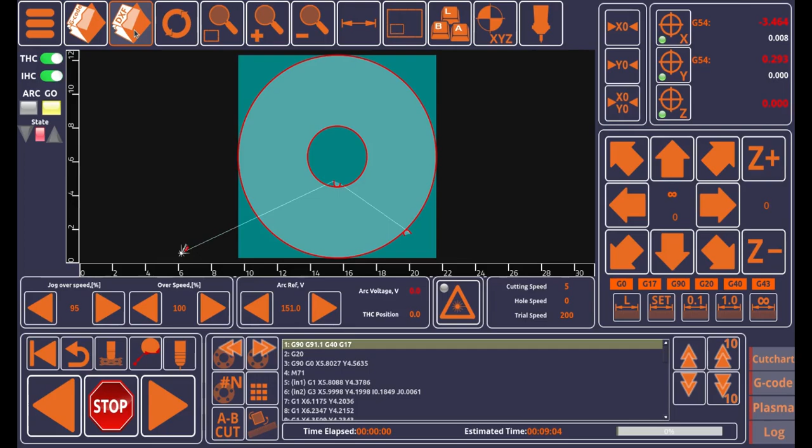So here I have a profile for MyCNC plasma cutting, and the DXF import button already has the command assigned to it, which is the DXF2-import command instead of the regular DXF-import. So DXF2-import is the new functionality. If we click on this button, we'll see the CAM window that we've already described in our previous video. However, here we're interested in the CAD functionality.

So here I have the CAD window in front of me, and it has a number of features that allow us to draw and design our own shapes, and then import them into the CAM window, and from there on import them into MyCNC. So let's quickly go over some examples to get a general feel of what we can do and design within the CAD window.

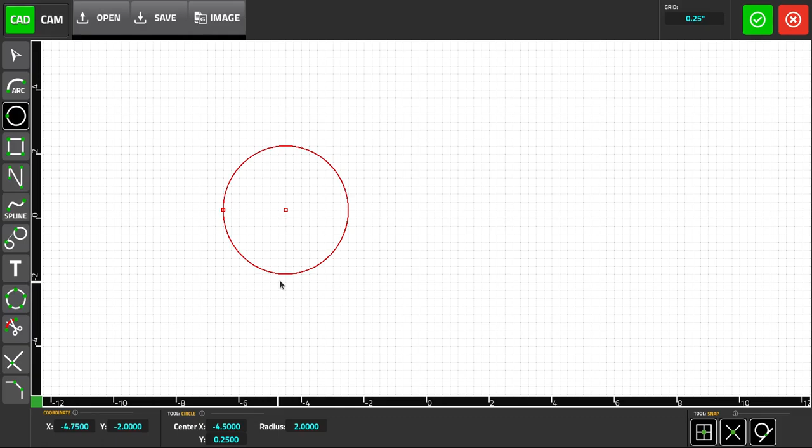First off, we can use the snap tool to snap the cursor to our grid, to our existing points, and to circles and tangent lines. We can set our grid, and then let's say we have this circle. It has a certain radius, maybe a radius of 2. It's positioned at a certain location. We can add more shapes. Let's say maybe we'll add some splines within this rectangle.

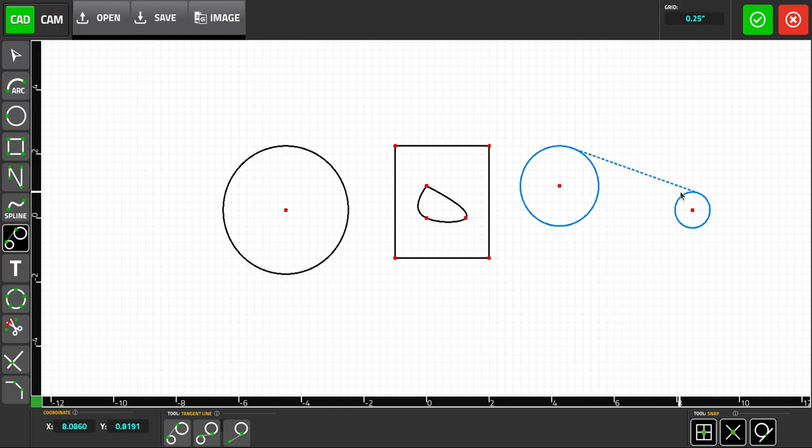We can create some circles that will be connected through tangent lines. And then we can also do things like remove certain lines. We can do things like subdivide circles into a set number of points. We can add things like text. And then we can also find intersections between points and do chamfers.

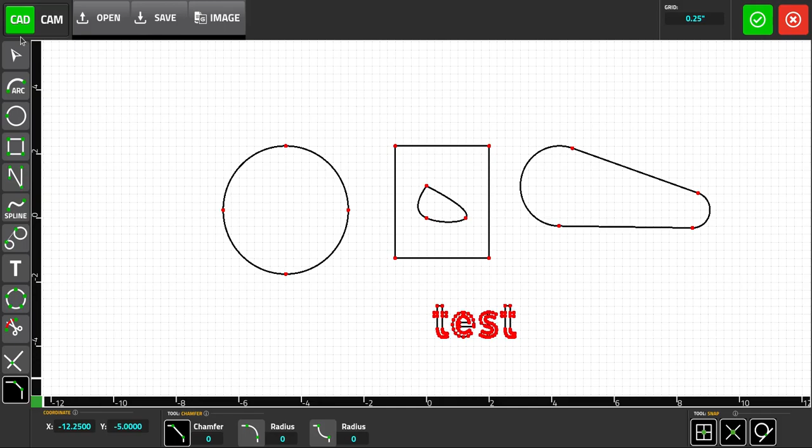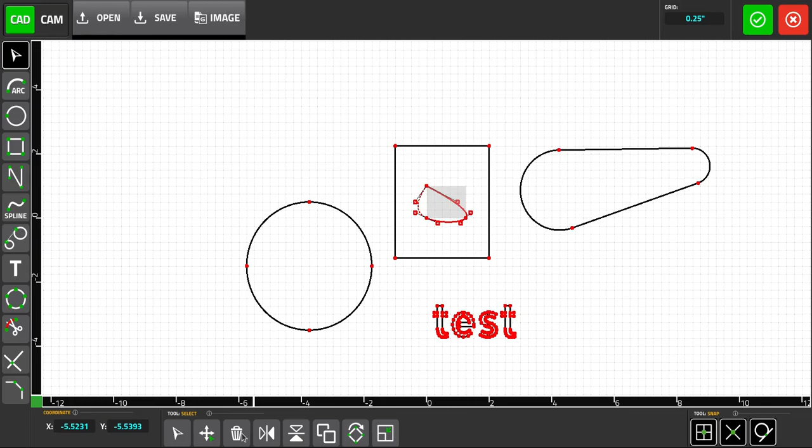So let's say we now want to manipulate this. We can select a certain shape and we can move it around, for instance. We can mirror a certain shape vertically or horizontally. We can delete a certain shape. Or we can also do things like copy, rotate, etc.

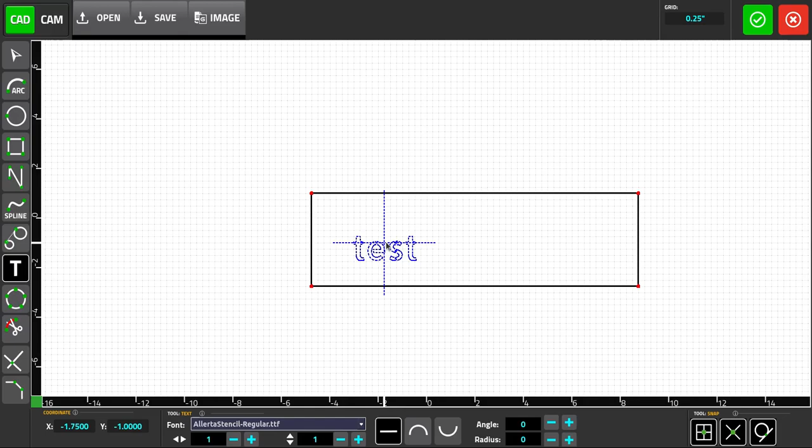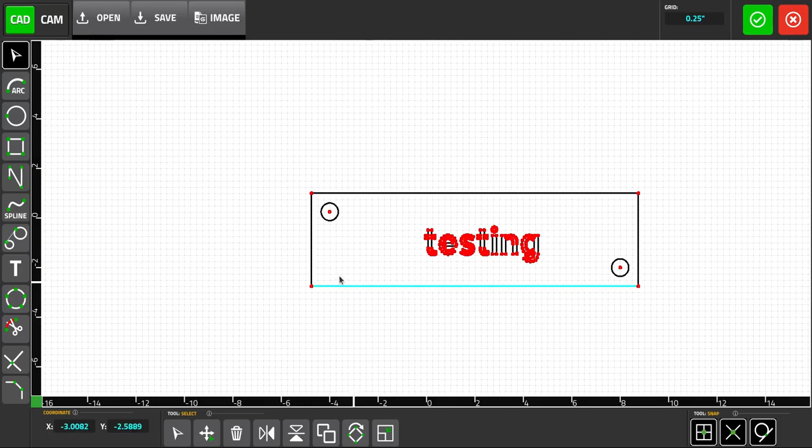So now that we have all of these things, let's say we just have a simple image here with a word testing and a couple of holes here that we're going to copy. Now that we have some kind of a file ready and we'd like to import it into MyCNC, we can click on the confirm button.

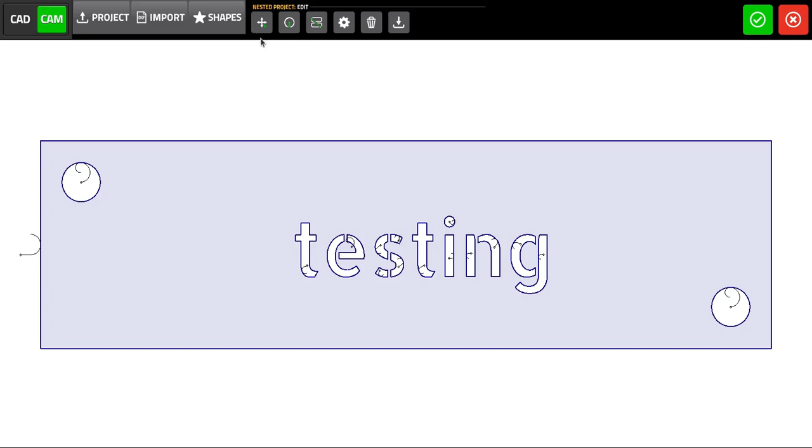So this imports it into our CAM window, and from here on we can edit it in the similar way that we've shown in the previous video. So do things like lead editing, we can scale this image, we can change things like our curve, etc. We can add more things like additional shapes next to it, etc.

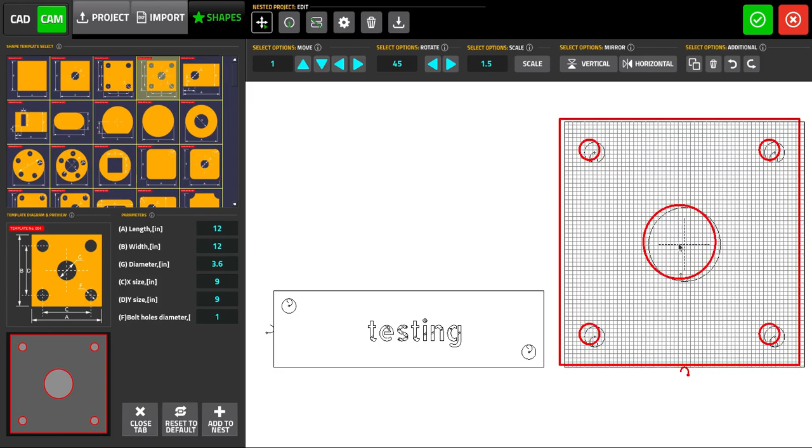And once we are done with our editing, let's say we move this a little to the side, we can import it into MyCNC as a file that consists of both our custom files designed in the CAD software as well as our CAM shapes and imported DXF files.